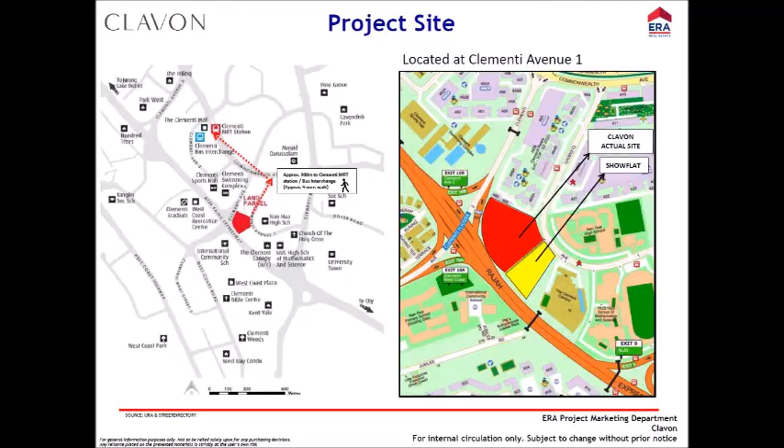Why are we sharing with you a little bit about how the name is being derived? Because that is the very idea the developer felt they wanted to make sure that when they wanted to derive the name CLAVON, they wanted it to be very linked to the origin of the site analysis itself.

So let's take a look at this CLAVON. CLAVON, Clementi. They studied the site - a very strong educational hub.

In fact, Mr. Liam, the Group CEO of UOL, based on his personal analysis, feels the world is getting more uncertain - trade war, COVID-19, etc. Educational hubs going forward will be ever more important, because a lot of foreigners, even many from Asian countries, will start to come over to Singapore for higher learning.

For instance, the nearby NUS is ranked as a top school in Asia and also the world. So this location analysis is also like an extension to One-North, an extension to the second CBD in the West, as well as the Greater Southern Waterfront. You start to see this?

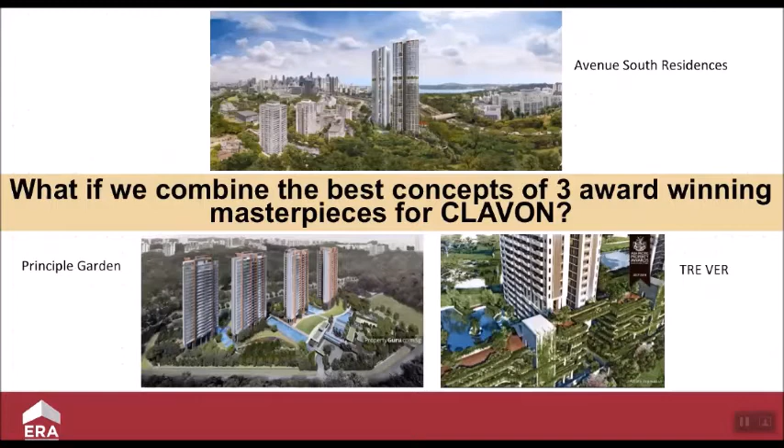Okay, so now look into CLAVON itself. It has sloping terrains. And the sloping terrains offer opportunities like upper decks and lower decks, which I'll be showing you the perspective later, and also the opportunity to create nooks and corners.

That is the best practice that the developer and architect actually provided for Tre Ver. So the nooks and corners will also be introduced into CLAVON to provide more social space, family magical spaces. Not only that - because of the down-sloping undulating terrain, it also provided an opportunity to build a basement car park, so that when we build a basement car park, we free up more land, more landscaping for the whole community.

Unlike our neighbor, the Clement Canopy, we want to be different, remember? In this case, the theme must be new, must be different. So our neighbor is building a multi-story car park, but ours will be a basement car park.

The overall theme would be a 5-star resort-style ambience. It's up to 40 levels, and it's a rare opportunity also - when the developers studied the site, they gained the best practices from Avenue South Residences, where one block will not block the views of another block.

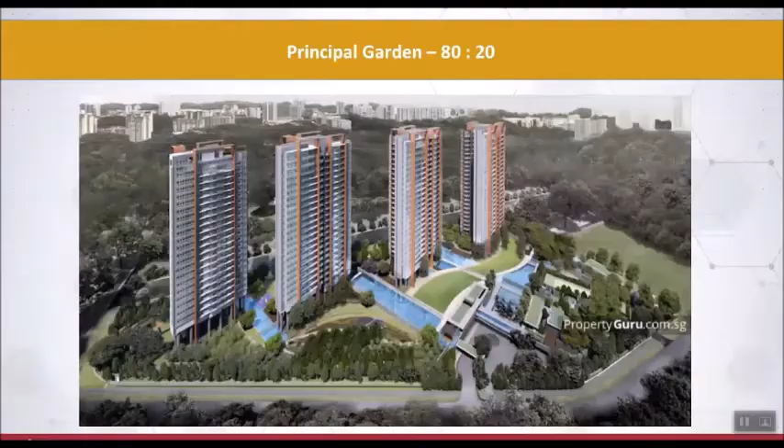Let's go deep now. As you can see from this, feel it, the 80-20 rule. Can you see the footprint? It's going to happen in CLAVON. Ladies and gentlemen, it's going to happen in CLAVON. The 80-20 rule, Tre Ver's nooks and corners. There will be pockets of nooks and corners for us to do our work, for us to enjoy. It would also be in CLAVON.

How about this? The majestic tower, towering all the way up with unblocked views, far views, will also be incorporated in CLAVON.

Award-winning developer, as you're aware, not only winning local awards, Asia awards, but also FIABCI awards. I only want to bring to attention the 3 award-winning masterpieces. Can you see Principal Garden? It is not short of awards. Can you see Avenue South Residences? Not short of awards. You name it, we have it.

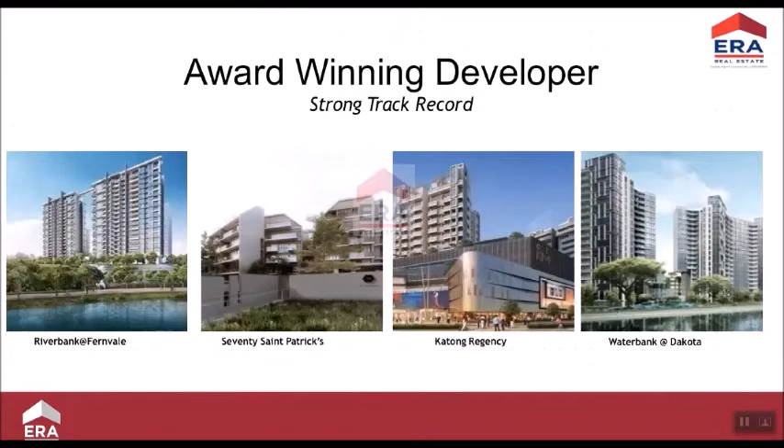And we're getting all the best practices into CLAVON. Take a look at Tre Ver. So that is that very gist. They want to get all the gist and the accents of these few developments coming together to make this outstanding product, CLAVON.

Bullet point number 2, architectural inspiration. In this inspiration, there will be 5 important things you need to know: site analysis, design concept, unit block plans, project concept, and perspective to give you that different kind of experience.

I'm very excited when I see this because the price is so irresistible with such a strong product. This 4th quarter 2020 will be our day, and our buyers' day as well, because they'll be getting this wonderful product at such an irresistible price.

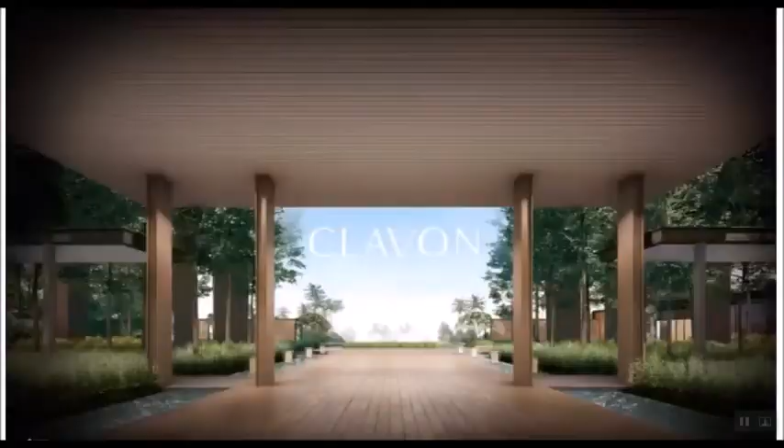So take a look at site analysis. Can you feel this, ladies and gentlemen? What did you see? That very feel when you come in. Can you see this? Later, I will elaborate a little bit more on that.

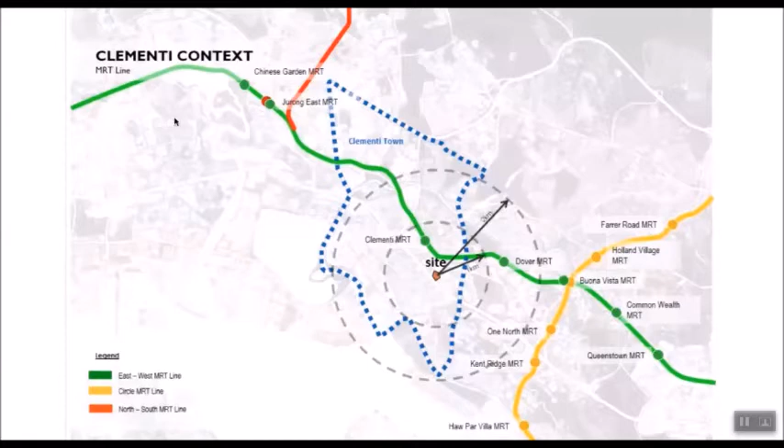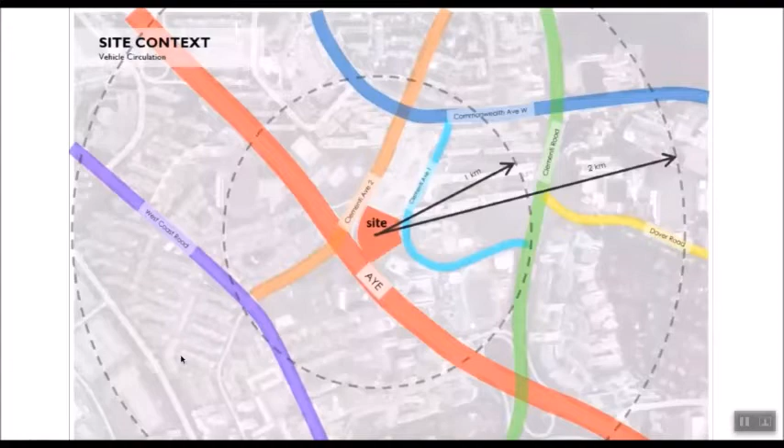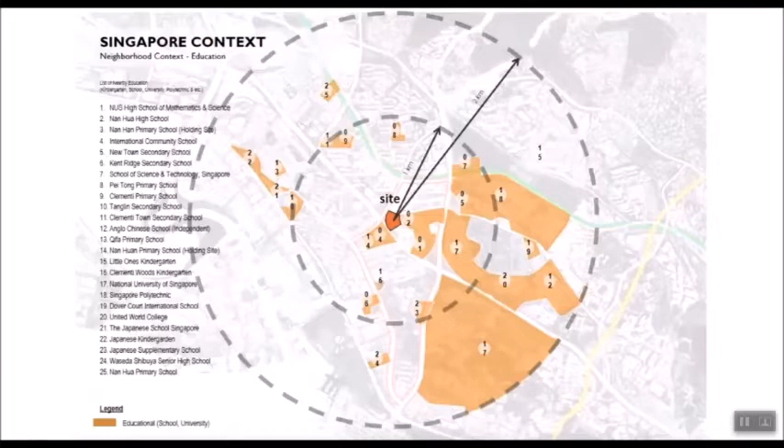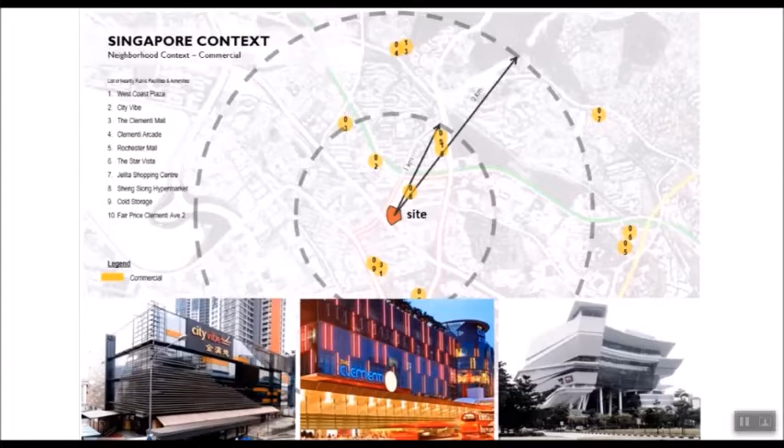Towards the east, the Singapore Botanic Gardens, and towards the city - that is towards the east. How about towards the south? Towards the south you get to see what we call the Singapore Strait and the sea view. Why is this so important? Because now we're analyzing the site - it has huge implications on the views that the architects are going to cleverly design to ensure optimization of views are afforded to all the clients, all the residents staying within CLAVON.

And how about to the west? To the west you'll be enjoying the Pandan Reservoir. See that? So you need to get your north, south, east, west view from the location CLAVON to have this big picture, so that you understand the overall architectural inspiration behind CLAVON.

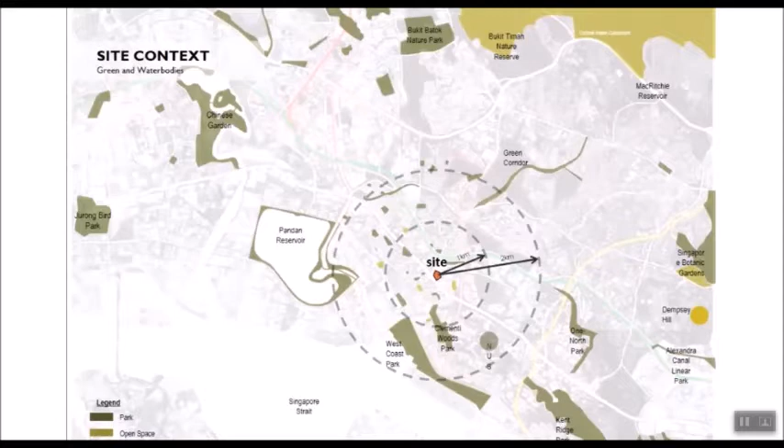So take a look into the master plan right now. As you can see from the master plan, towards the north, the plot ratio is 3.5, that's why it allows CLAVON to build up to 40 stories high. But of course in this context they build up to 37. But we can build as high as 40 stories based on the 3.5 plot ratio towards the north.

How about towards the east, where you get to see the educational zoning? Towards the south you already know the sea, and towards the west is where Pandan Reservoir is.

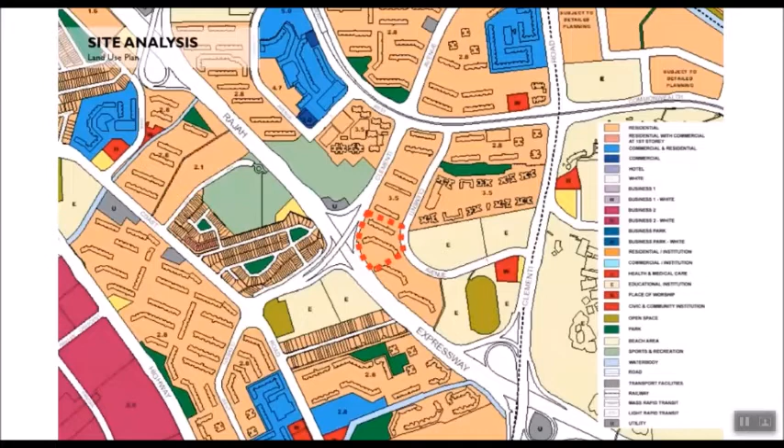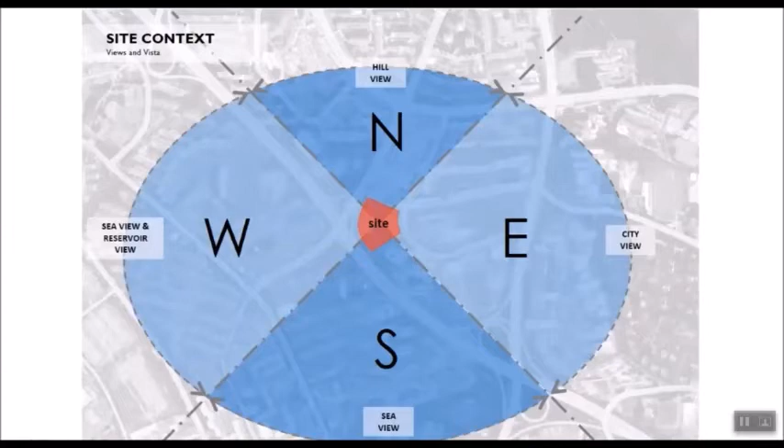So in summary, that is where it'll give you an idea. Hill view towards the north, city view towards the east, sea view towards the south, and towards the west the sea view as well as the Pandan Reservoir view. So that is the site analysis.

Now let's move into the design concept after knowing the site analysis. The very idea is to bring up the two majestic towers. So we explain why it is 37 floors. Because the developer actually lifted the majestic tower up by 8.5 meters, which is about 3 stories. So 3 plus 37 is 40.

You see my cursor here? They lift it up so that there's a very huge elevation buffer away from the AYE - an elevation acoustic buffer.

Not only that, when you lift up, can you see the green color arrow? Because of the undulating terrain, it allows a cascading upper deck and lower deck feel all the way down. Remember CLAVON - they wanted to be new, different, refreshing. It's very different because we rarely see a condominium enjoy this cascading upper deck, lower deck feel.

All the units are going to be north-south orientation. There's not a single unit that's having the west sun. Can you imagine that? It's amazing - it's going to benefit all the residents.

For all those higher floor lovers, you get to see the panoramic views unblocked. For those on lower floors, they'll be enjoying the cascading, beautiful landscaping view that soothes their emotions, that soothes their soul when they're working from home.

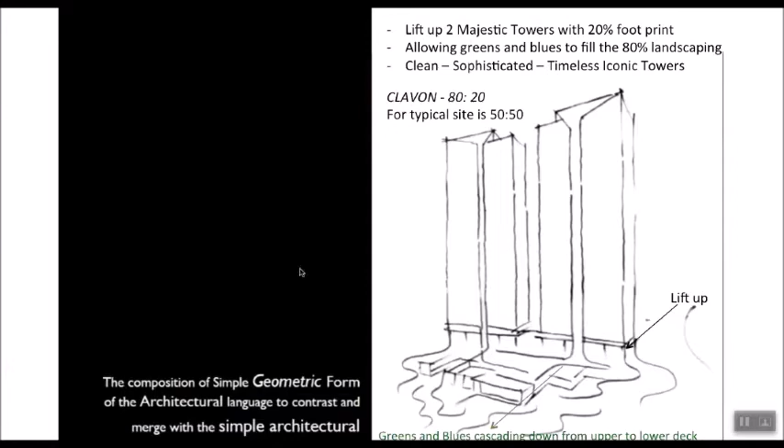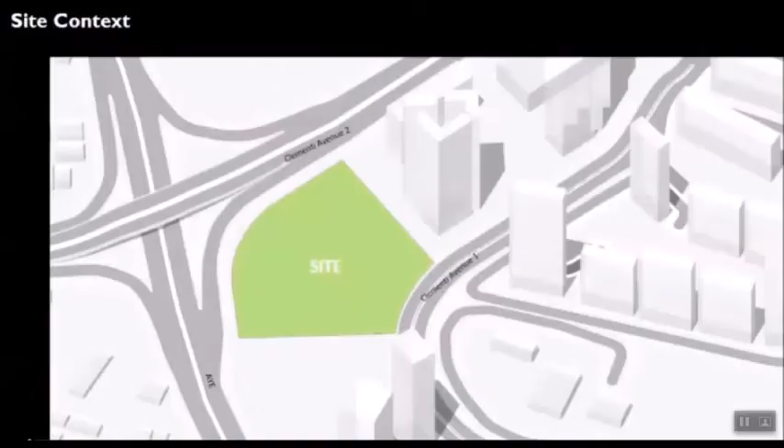Let's take a look at the site right now - zooming in at the site, the constraint. Constraint can become an opportunity when we analyze it properly.

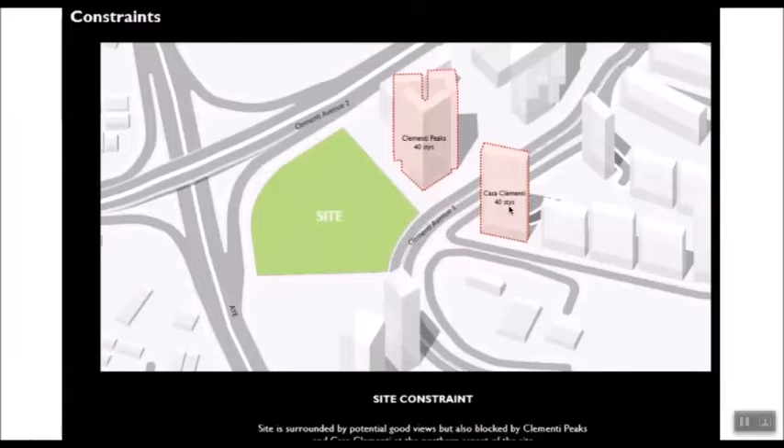Towards the south, you get to see there's the 40-story HDB block called Clementi Peaks and also Casa Clementi, towards the north. Let me superimpose the building for you right now. Can you see these two majestic towers? One is block 6 and this is block 8. This is the elevated tower we mentioned earlier on.

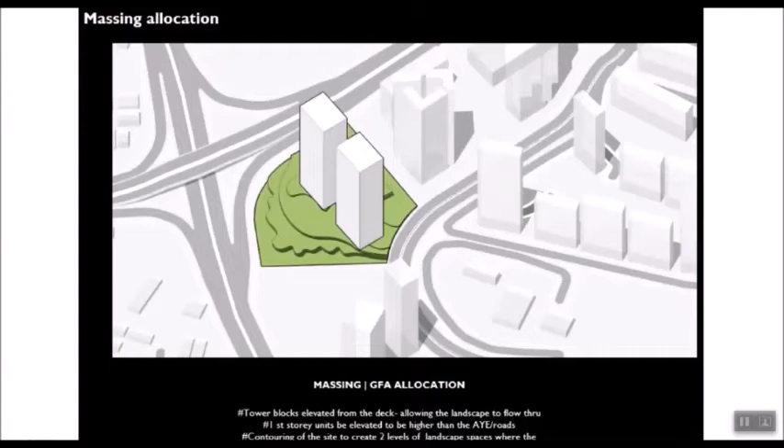And how about towards the north? Towards the north, the developer and architects deliberately tilt the block. Can you start to realize they tilt the block? I think very observant.

I'm very excited, okay. So you can see they actually deliberately tilt the block. Initially it's straight, but they tilt it. Why do they tilt the block? Can somebody make an intelligent guess why they tilt these two blocks?

Yes, to optimize the view. Thank you, CK. Thank you, Linda. Better view, yes, please participate, because once you participate, the whole key gist of the inspiration will be within you. Correct? No blocking sea views.

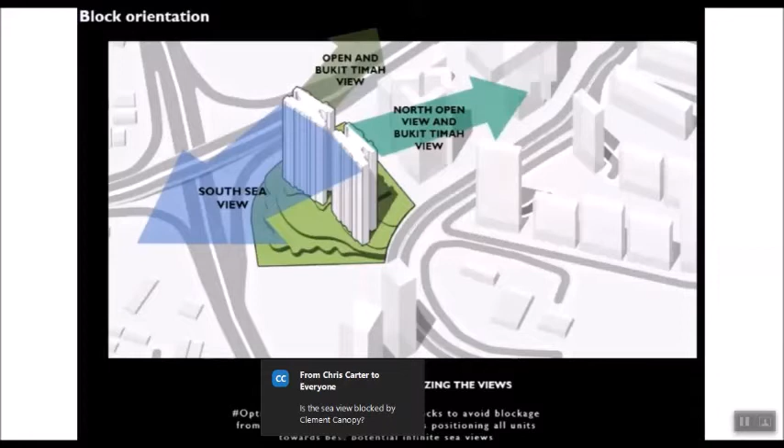Yes, you're right. You see, they're using size, using computer dimensions. When they tilt these two blocks, Majestic Tower, towards the north, they will be able to see that corridor, the Bukit Timah corridor view towards the north. That corridor view affords the best view for those who buy units facing towards the north. The ones facing towards the south will get sea views.

Remember the site analysis? So all this will come into play, because we know the surrounding well.

So the whole gist, the whole inspiration is focusing on what? Maximization of views. Can you write: maximization of views and lights into the units? So not only is the two majestic blocks north-south orientation, the overall architectural concept is to also maximize views and maximize air and light within the building.

Can you see I superimpose now? Yes, Jesse, you're right, maximization of views. Take note: views, light, maximization of views, light and air, because of the north-south orientation. Ladies and gentlemen, know how to articulate this very concept, maximization of view, air and light into the unit. Can you imagine you are the resident staying in it? You enjoy fresh air, because it's being tilted to make sure the air will flow into the unit, the light will flow into the unit because of the tilt.

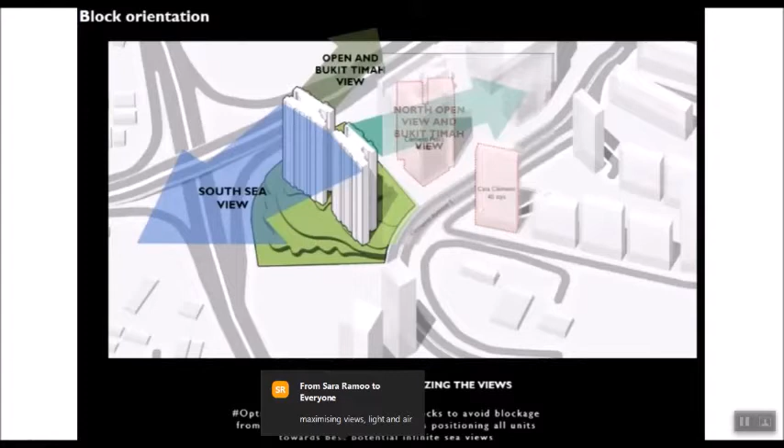You saw the tilt? Can you see the two 40-story red color buildings? It is deliberate tilt to have that corridor, open corridor view towards the north. See that? It is very attention to detail. So show all these slides to your client when you see them face to face. You see that red color one? The positioning is for that purpose.

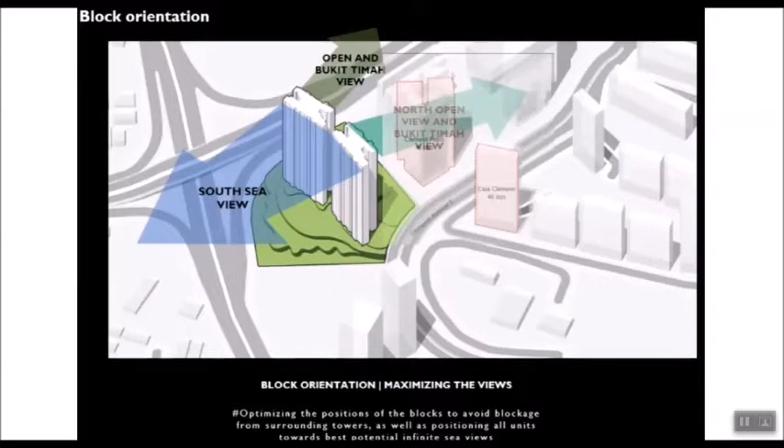That is the ground level, all the way to the infinity, to what we call the upper deck, to the lower deck. And this building, remember, it is being raised, okay, raised 8.5 meters, almost approximately 3 stories. And that is where the AYE is. From this distance, from the AYE to the units, is as wide as 31 meters to 90 meters horizontal buffer. Can you see the horizontal buffer, the noise buffer?

And not forgetting that one is a slip road, the noise level is actually very minimum. Plus, for the windows and sliding doors, it's thicker compared to the ones facing the other side. Not only that, acoustic ceiling will also be provided for all the units facing towards the south. While they enjoy the nice view, they also enjoy the acoustic treatment. And a window restrictor, with the calculation of the window restrictor also provided, to reduce the noise level decibels to the minimum. So these are all the attention to detail for one to enjoy in CLAVON.

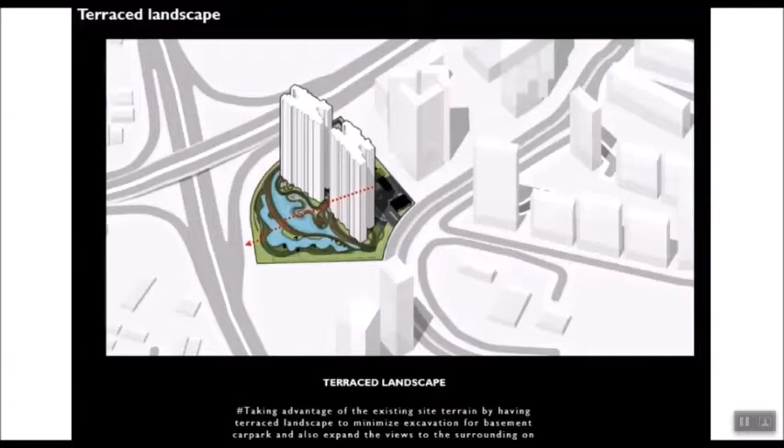Yeah, so take a look more. If you look at this expansive view right now, towards the north, hill view; towards the south, sea view; towards the east, city view.

Yeah, all the units are north-south. Towards the east is city view and towards the west is Pandan Reservoir view. Later I'm going to show you the attention to detail - they also want residents to enjoy both the east and west views, which I'll show you shortly.

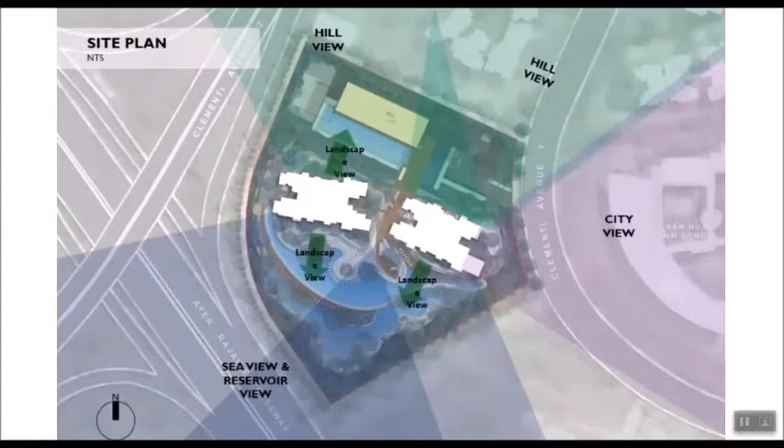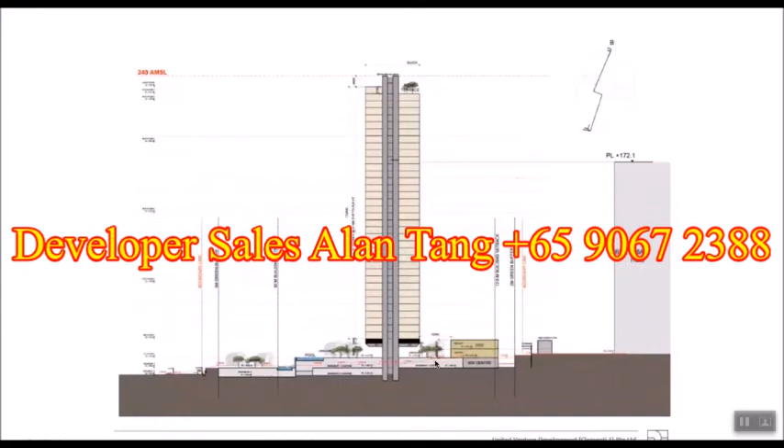The bin center and the substation are tucked into basement 1. The whole of basement 1 is actually the basement car park, tucked quietly below.

This is what we call the upper deck, and this is the lower deck. You can enjoy 2 infinity experience views. The first infinity view - take a look here. Remember the theme: new, different, refreshing. It's an OCR project that offers this unique product that no other project can match, even compare. As you can see from this infinity view on the upper deck, there's another infinity view towards the treetop, which I'll show you shortly.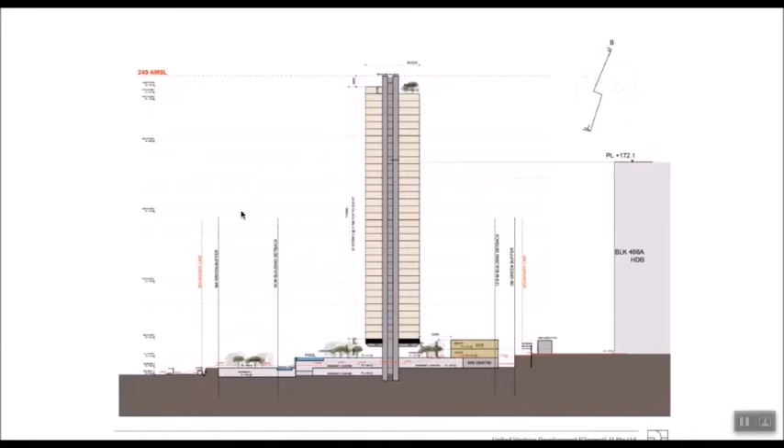At the highest level, it's the 37th floor. Remember the east and west view - that's where they've imbued the sky terraces for all residents to enjoy panoramic views and sky dining experiences within the 37th floor roof terrace. Can you see the roof terrace that affords one view towards the east and one towards the west? That's the concept of this very high-rise majestic tower.

How about the site plan? Looking at this site plan, you can see there are 3 side gates. One side gate here, and another side gate towards Clementi Avenue 2, where residents can walk over to Clementi MRT very easily. For those who know how to recce and walk through the HDB, you'll realize it's even shorter if you use this side gate to walk towards the MRT.

There's another side gate at the bottom - 3 side gates in total for residents to leverage to get to amenities and transportation hubs. As you come in from Avenue 1, that's where you enter this grand entrance, which I'll show you in a perspective later. It's very private - as you come in, you'll also be privately led into the basement car park without disturbing your entrance, giving you that flexibility.

This is a 50-meter lap pool at the upper deck. A nice clubhouse - the clubhouse is going to wow you, with three themes. Function rooms 1, 2, and 3 each have a very competitive theme for residents to enjoy, with games rooms and karaoke rooms all tucked into this corner. The 80-20 rule - can you start to see it on this very small footprint of the majestic tower? It's actually flushed and surrounded with all the landscaping, hugely covered by greens and blues cascading all the way down. That's the ideal.

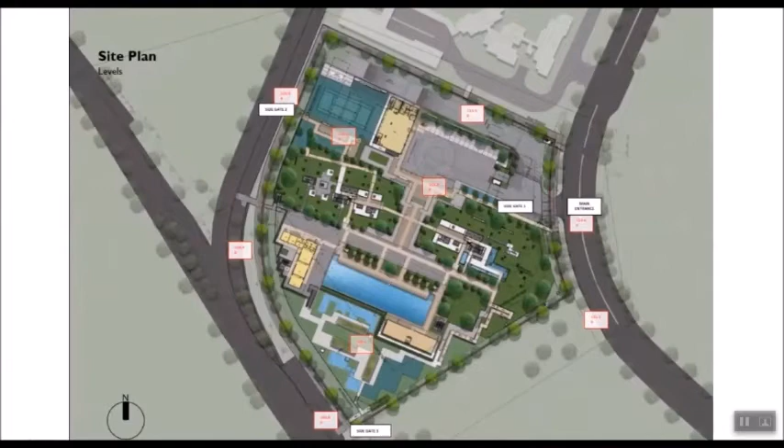Basement 1 is where all the car park is, and basement 2 as well. So now, imagine the experience of driving along Clementi Avenue 1 as you enter.

The main idea is new, different, and refreshing. When you come in, you won't see the building - it's a controlled, very nicely calibrated view where you'll be greeted with this vast grand entrance on the drop-off. As you enter, you'll be greeted with this infinity, wide, expansive view towards the sky and towards the water, and you'll be walking towards the forest corridor.

Can you see the 2 linkages here in my perspective? These linkages lead you to your respective apartments, without being disturbed.

Can you see that golden-feel roof that gives you an upper luxury feel as you're greeted coming into the entrance? That is the very first experience the developer wanted residents, family, and guests to enjoy when they come in.

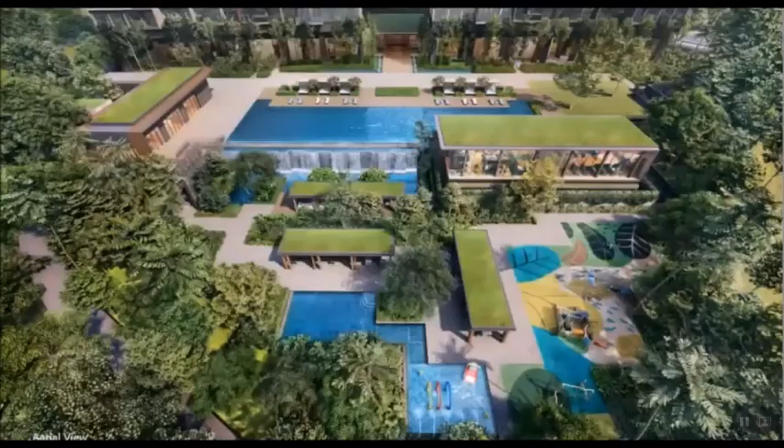Can you see from here, it's cascading down all the way to the water cove where you can enjoy? On the right is the gym and social lounges, what they call the gym and social lounge. It gives you all the nooks and corners, and from here you're able to see the infinity pool.

You also get to see the lower deck playground. Imagine as a papa and mama enjoying this view while overlooking your children playing at what we call the children's paradise. This is the dry play and that's the wet play, and this is the kids' pool at the lower deck. The whole upper deck is more exclusive, 5-star light ambience, while the lower deck is more family, community, social ambience. They want to bring these two experiences together within CLAVON.

That's the aerial view from the top, and another view towards the clubhouse. This is the clubhouse, and to the left is where the gym and social lounge is, giving a different perspective. This is function room 1, themed around overlooking the water courtyard to give a more official kind of feel.

Say for example you want to get some important business associates over - it's a different mood, different theme. The second function room is more leisure, facing the infinity wide 50-meter lap pool, overlooking the pool deck. This is where you can get your family over, or quietly come into the function room to do small gatherings.

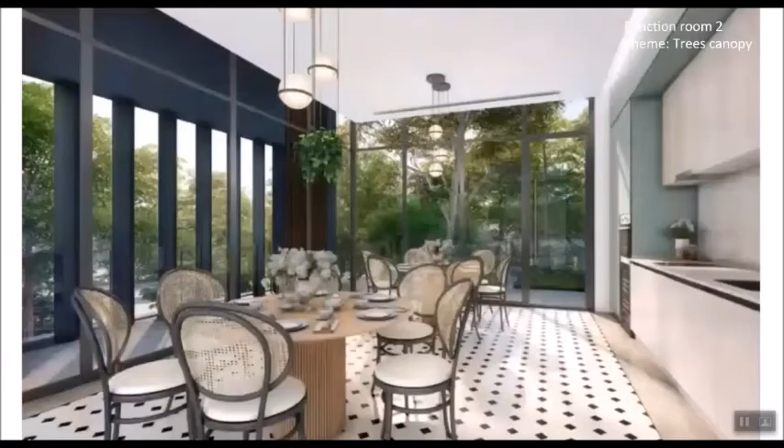The third one is on the canopies, the tree canopy experiences, providing three different experiences for you to enjoy. There's another view from the pool deck towards the gym and social lounge, giving you an infinity expansive view while enjoying the sunset setting. It's amazing.

It's amazing - you can tuck into this corner here doing some reading, enjoying the expansive 80% landscaping that seldom condominiums offer. This is another experience, the nooks and corners where you can go into the lounge, sit at the sofa here, and enjoy the whole overarching view of the soothing cascading water, seeing the landscaping of the upper deck towards the lower deck. That's what they want you to enjoy.

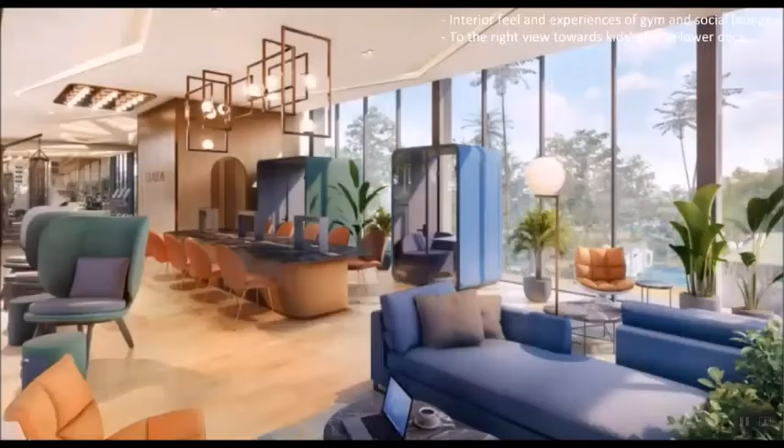How about the interior? The interior is sophisticatedly designed, very contemporary, to give you the right feel. On the right is where you get to see the children's kids' play area, and further up here is where it integrates between the gym and the social space.

Imagine after a day's work, you go for your gym, and afterward you can just proceed to the social space to do some reading if you want. Or even your wife can be reading the newspapers while you're doing your gym. It's all important attention to detail, to bond the residents together.

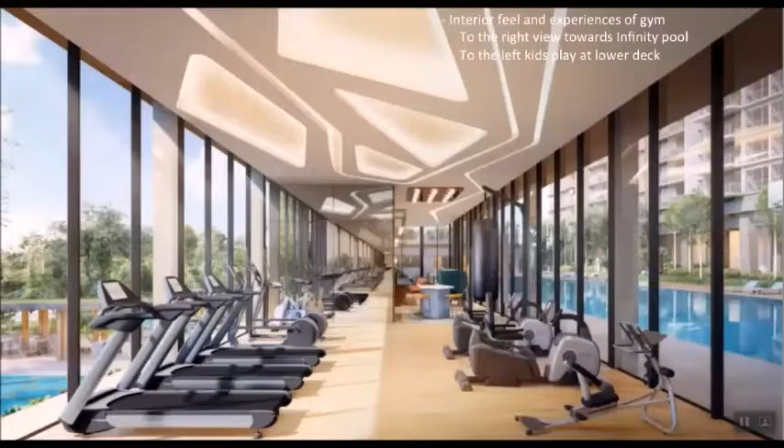This gym gives you two different experiences and views - one on the right towards the infinity pool, leveraging a glass partition to enjoy two expansive views. Towards the left is where you can enjoy gymming while also getting to see your kids playing at the kids' paradise area.

So it is that very different experiences that CLAVON wants to bring out the best of living for all the residents within it. Now let's zoom into the units and the block plans.

As you can see, the east and west views are being leveraged on the 37th floor. Tower 6 faces west, towards the Pandan Reservoir, where families enjoy that view on the 37th floor. Tower 8 enjoys an expansive view towards the east, the city view. So you get the best of 4 views: north, south, east, and west, giving residents that diverse experience.

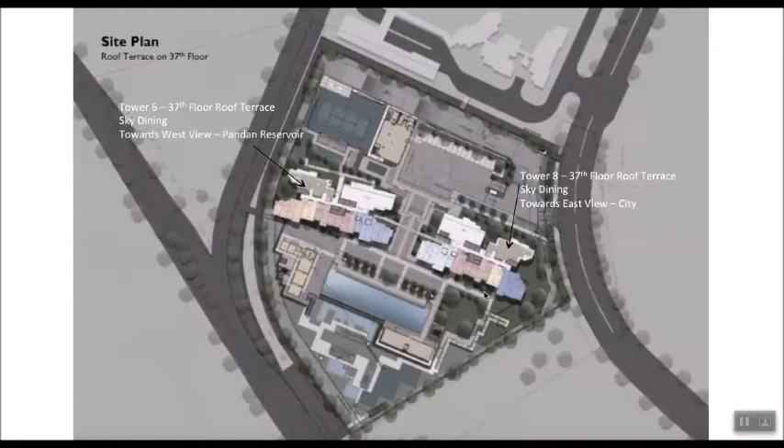And this is the site plan, with very sophisticated, well thought out facilities. All these amenities are actually tucked away quietly down at the basement, like the bin center and a substation, where residents don't even notice it.

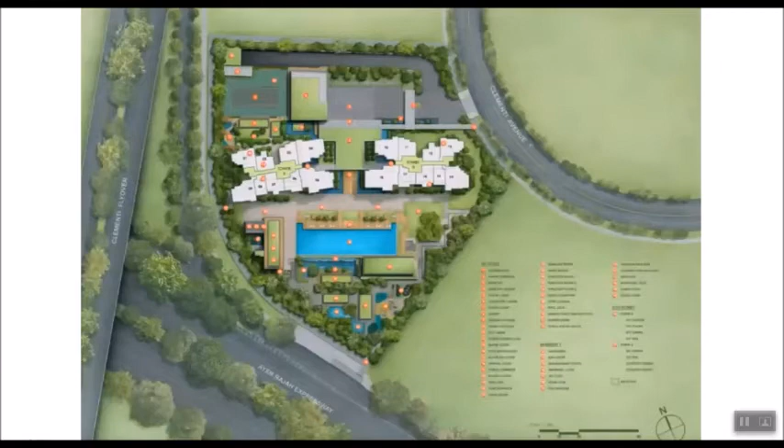The block generally has 5 units towards the south and 4 units towards the north, so in total 9 units per block. It is served by 3 lifts and 2 staircases. As you can see from this perspective, the bigger units - 3-bed, 4-bed, and 5-bed - are all tucked quietly at the corners. So all the corner units are 3-bedders, 4-bedders, and 5-bedders. The concept is very clean and simple.

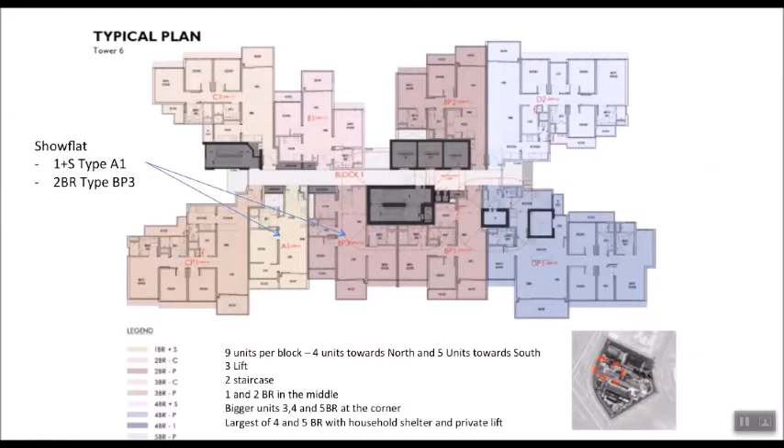As you can see from Tower 6, the highest level is where you enjoy the north, south, east, west views - in this case the west view. This is the roof terrace, and these are the 4 units facing south. Tower 8 is exactly the same concept, except the roof terraces face towards the east, what we call the city view.

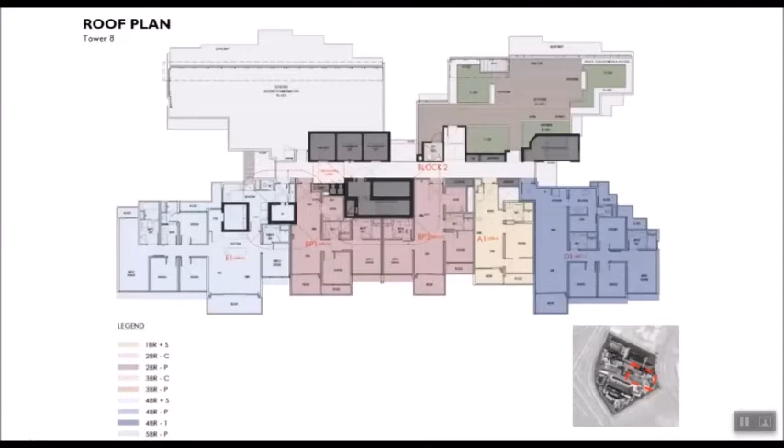Let's take a look at the floor plan. For the 1-bedder, as you enter from the main entrance, it's very sizable, with a nice kitchenette, greeted with a nice living and dining area. This is a next-generation condo concept, where you can enjoy a very sizable study area, divided by a glass partition.

When you see the show flat, you'll be totally wowed. Right now you only see it in 2 dimensions, but when you visit the show flat, likely next week, you'll be amazed - the size is so sizable. This layout allows more light and air into your bedrooms, and owners also have the flexibility to close it up if they want.

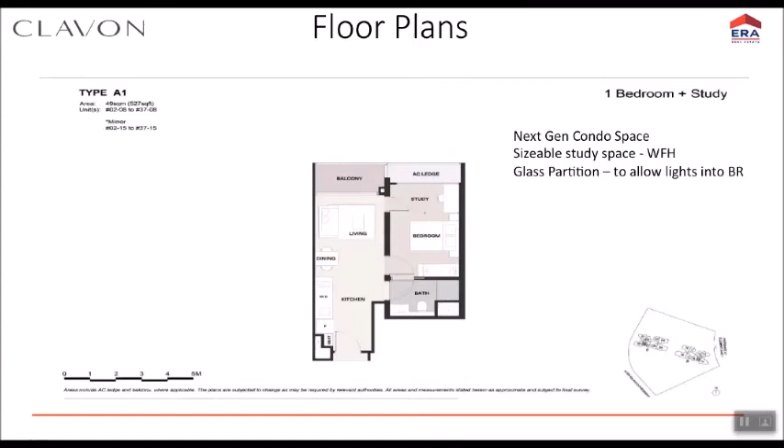How about the 2-bedroom? I'm focusing more on the show flat unit for now. It's a butterfly unit - can you see the butterfly wings? Superb layout with minimum corridor, in fact no corridor at all if you notice the 2 bedrooms - super efficient. On the left, the master bedroom easily fits a king size bed, and on the right, the second bedroom fits a queen size bed. There's also a nice closable kitchen, neatly tucked in. Most importantly, the living room, master bedroom, and bedrooms all face outward panoramic views.

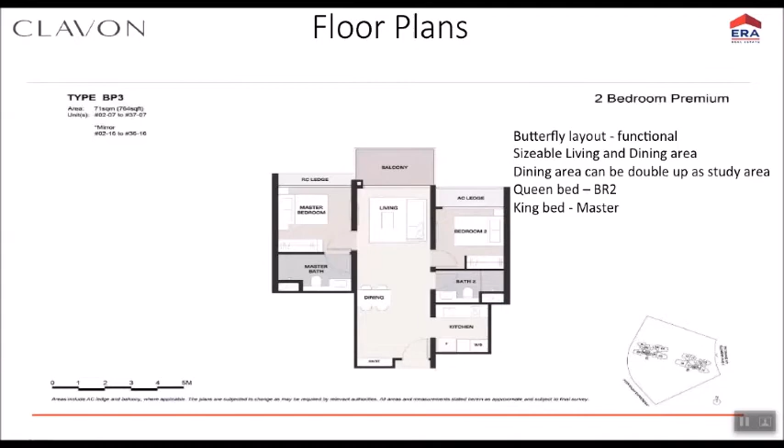So that is the show flat - show flat unit BP. P stands for premium, B stands for 2-bedroom. Just in case for those who are new, A usually refers to a 1-bedroom, but in this case it's 1-plus-study. So the show flat includes the 1-plus-study and also the BP3.

The butterfly layout is very good for investors, giving you the flexibility to rent out either as a whole unit or to 2 different tenants, since there's privacy with one going to the left and one to the right. The central area can also become a co-living space for those investors who want that flexibility.

And what about singles? A single may want to stay in one of the rooms and rent out the other, getting rental income to help ease their mortgage. So there's a lot of flexibility in this very well thought out layout.

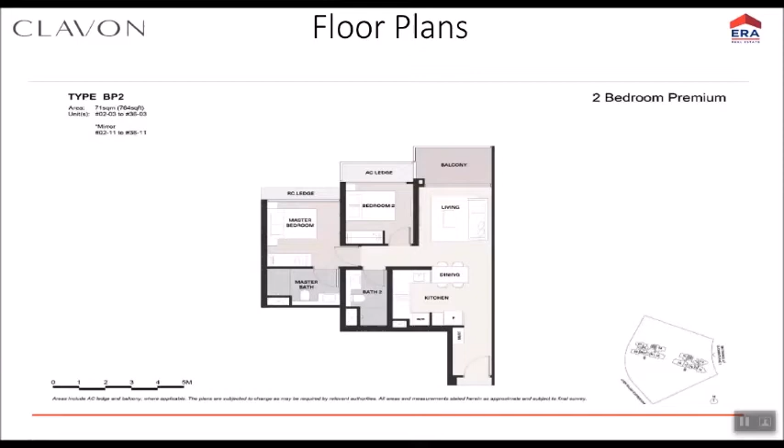Okay, this is the CP1. As you can see, C stands for 3-bedroom, P stands for premium. This is the show flat unit. So for the show flat, we have the 1-bedder, the BP3, and the CP1 — 1 bed, 2 bed, and 3 bed.

Take a look at this dry and wet kitchen. It comes with a very sizable dry kitchen for you to entertain your guests, and a wet kitchen for you to do nice cooking for the family. A lot of attention has been paid to the layout.

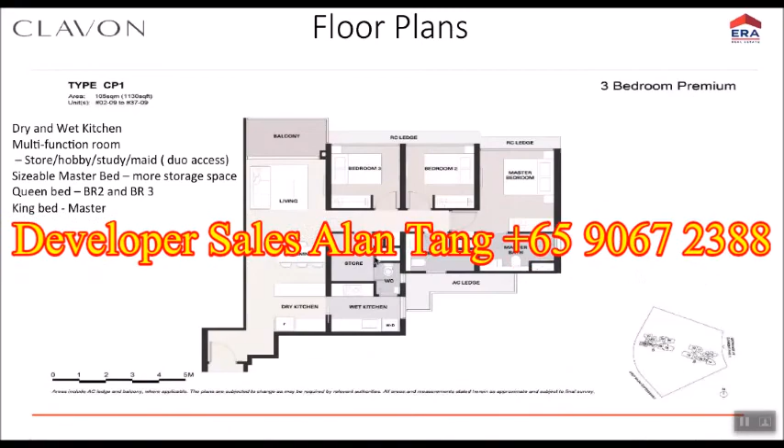Remember, can you see the storeroom is very sizable? This storeroom is not just a storeroom, it's a universal multifunctional room. You can double it as a domestic helper's room with an attached WC, so the maid enjoys her own attached WC and the whole yard area. Or you can double it as a study room if you want, since it's sizable enough, or for storage, or even a hobby room.

Can you see that? That's the main idea — the developers wanted residents to have this flexibility, because post-COVID, or the post-COVID circuit breaker, a lot of us are now working from home, so it provides you with that flexibility.

Bedroom 2 and bedroom 3 can easily fit a queen size bed, and the master bedroom is very sizable — you'll be able to fit what we call a mini study if you want. If you want additional storage area, you can fit that in too. It's unlike those very small master bedrooms; you're able to fit a king size bed and still have space to maneuver. Very functional for you to enjoy living in this 3-bedder.

Keynote is this part — the universal room. Take note of this, something very unique compared to other developments.

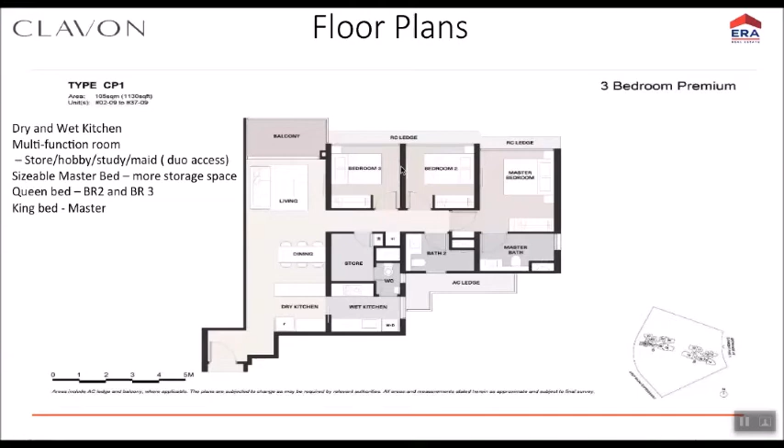This is the perspective. Okay, there's a typo error here, it should be CP1. It is a show flat unit looking towards the entrance — you have to see it, very beautifully done up. 3-bedder, marble flooring, good space, and so on.

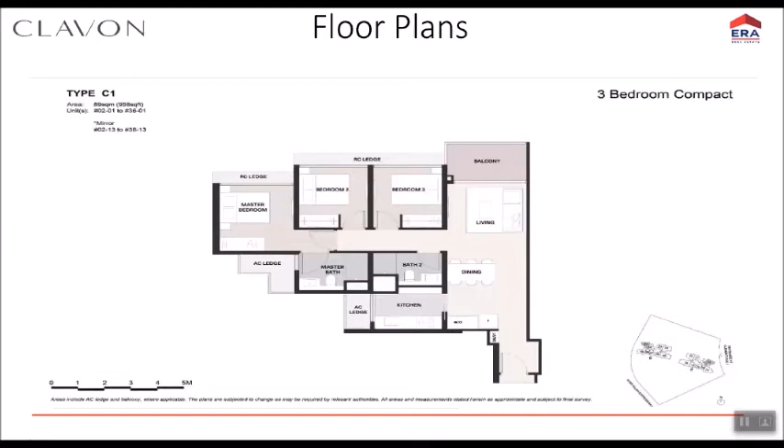So how about the other 3-bedders? The C1 layout is the smallest 3-bedder, at 958 square foot. As you can see, what's common here is that all 3 bedrooms and also the living room are all facing outwards, providing residents with maximum views, light, and air into the units.

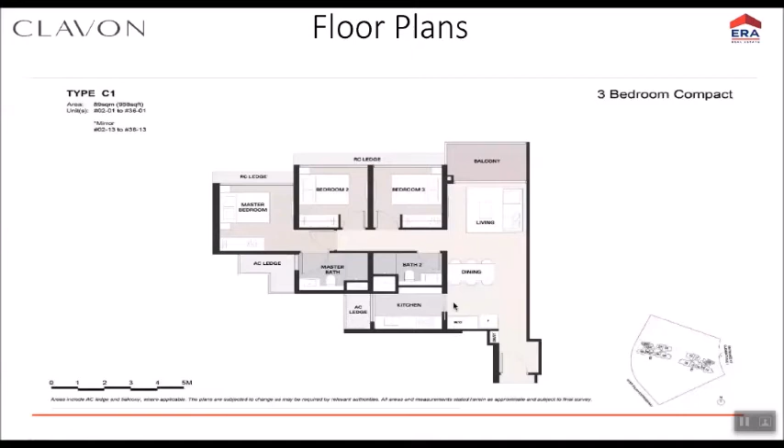Into the units we have what we call a naturally ventilated kitchen, very suitable for family stay, and a very well-connected bath towards bedroom 2 and bedroom 3. So this is the C1 layout.

How about the CP2? Remember, P is always premium, meaning a bigger unit — in this case, 1130 square foot. What is common? All the bedrooms, as you can see from here, and the living room face the expansive outward view. This is where I want to highlight for the premium.

Remember this store? It is a universal room. Can you see the linkages? They actually provide the flexibility to link from the wet WC out and also from the corridor. That dual access flexibility is important, because it gives you an idea how you want to use this universal room to suit your own family needs.

So say, for example, if I'm a family with a domestic helper, I can convert this into a domestic helper room where my domestic helper will be working along this whole area here, providing me with the rest of the privacy.

But let's say, for example, for a housewife who didn't employ a domestic helper, you can easily fit this as a study room, or we call it a mini library for your kids, where you line up all the books, etc., or even a hobby room, a study room, to enjoy.

So while you do your readings here in the reading room, the housewife may be able to just exit from here and start to do the cookery for the family. You see that? It is that flexibility to provide the needs and wants of the family for this whole layout. Don't underestimate this, because a lot of attention to detail is warranted before we are able to derive this kind of layout.

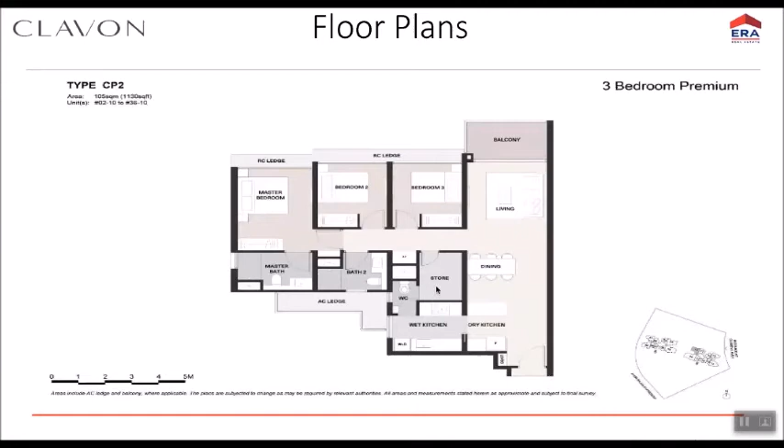As you come in from here, this particular bath is well connected to bedroom 3 and bedroom 4. And as you can see from this very nice, expansive master bedroom with attached bath, it's all very functional, easily fitting a queen or even a king size bed. And if you realize, the master bedroom allows us to also put additional storage if you want to. It is a sizable 1281.

Why does 1281 feel like a very affordable quantum yet very sizable? Because of the very short corridor. Did you realize that? A very short corridor is provided to allow you to enjoy this enhancement of the function of these units.

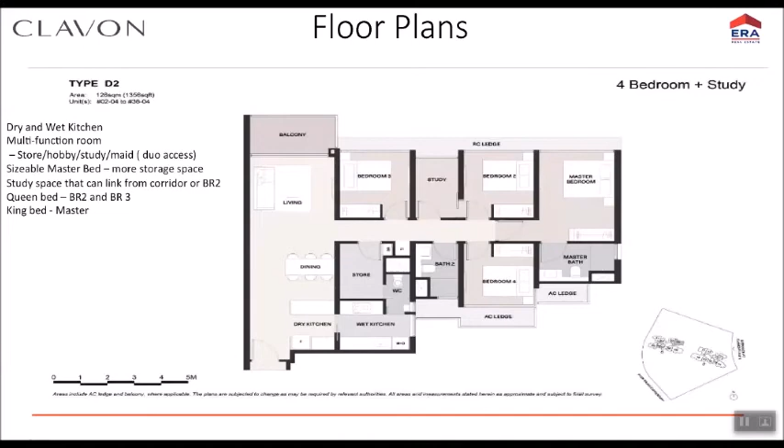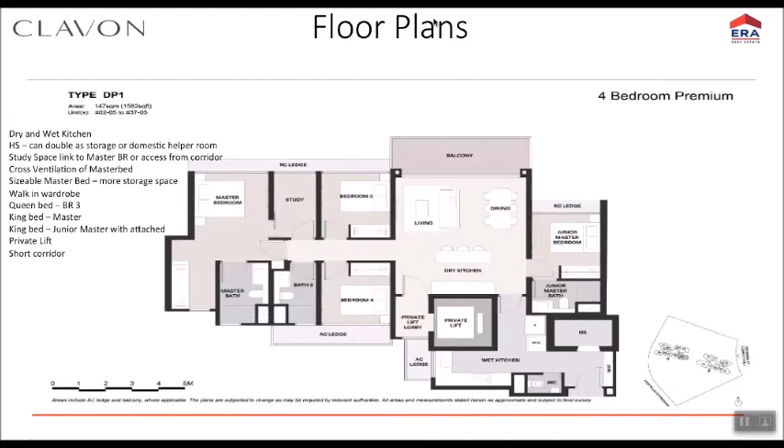Take a look, thank you for your patience. I just reset my computer. Cross ventilation for the master bedroom, as you can see. All the bedrooms can easily fit a queen size bed. Most notably, can you see the study room? It is actually connected to the master bedroom. These are some key things all of you need to be aware of, attention to detail. The junior master is tucked on the right-hand side of the layout, and it's 1582 square foot.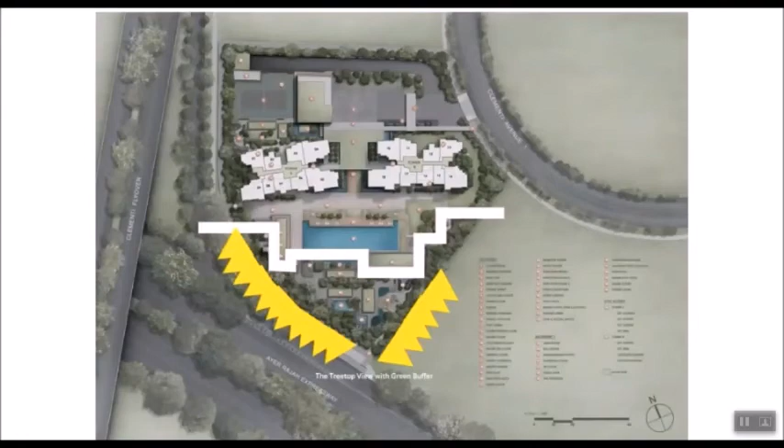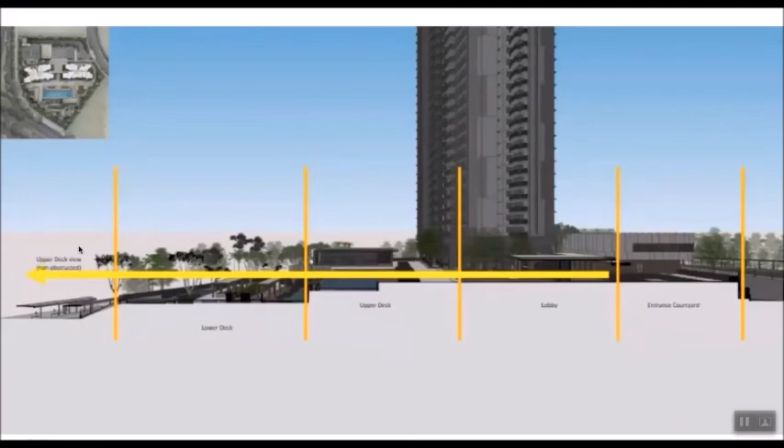These slides you can actually show your client as well. As you can see from this cross section here, this is the first, what we call, upper deck infinity view. See my cursor? And the other one is the lower infinity view. As you can see from this whole perspective, it's unobstructed, giving you that horizontal view, as measured by the landscape consultant.

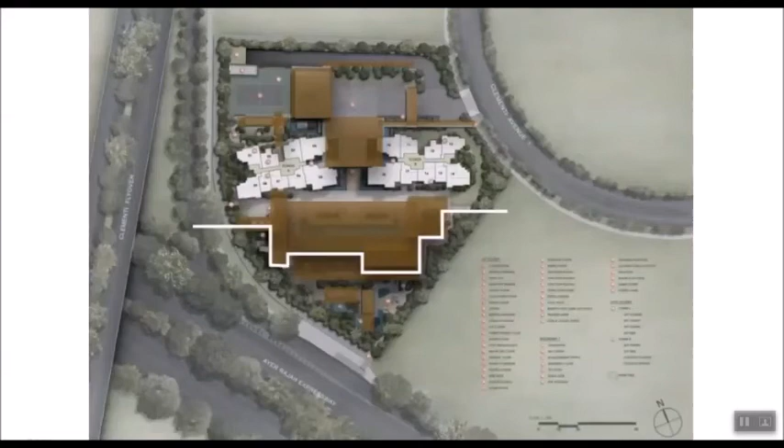That is the very raw drawing where they created the inspiration. Once they started tucking in all the social facilities, the 50-meter lap pool, kids pool, that's where they put everything together to make sure the dimensions fit. As you can see from the brown color scheme, the recreational area is behind. This is the grand entrance with the CCC, a very large grand lobby, with only 2 small footprints for these 2 majestic towers.

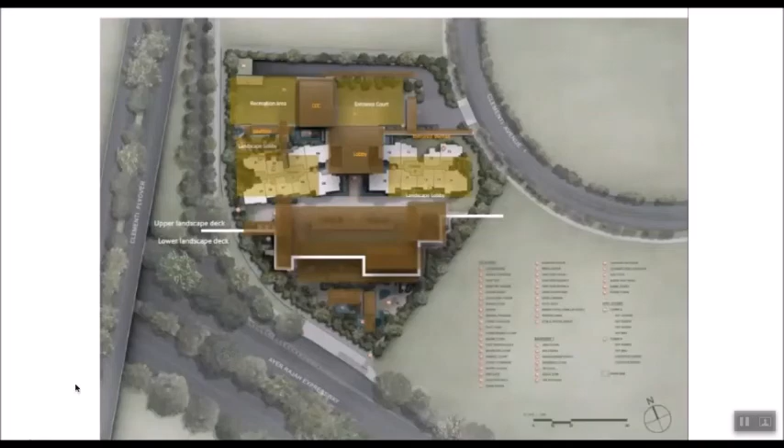And this white dividing line is where the upper deck is. Beneath it is actually having the treetops. Remember the B trees that's lining up the whole perimeter, leveraging on the 80-20 rule. The inspiration of this whole landscaping comes from this perspective here, a very large upper class view. That is where the architect wanted to create the very subtle but yet upper class luxury.

So let's take a look. The orange color here, I want to give you an idea about looking out, looking out towards the entrance. That is where you look out. Can you see from the arrow here? That is the very grand view, the contour view that we mentioned. And how about looking towards the infinity?

You saw the infinity lined up by the forest walk that we mentioned earlier on. So these are all well thought out, it doesn't happen by chance. You want to give it a visual corridor, the visual corridor all the way expansively to leverage on the terrain.

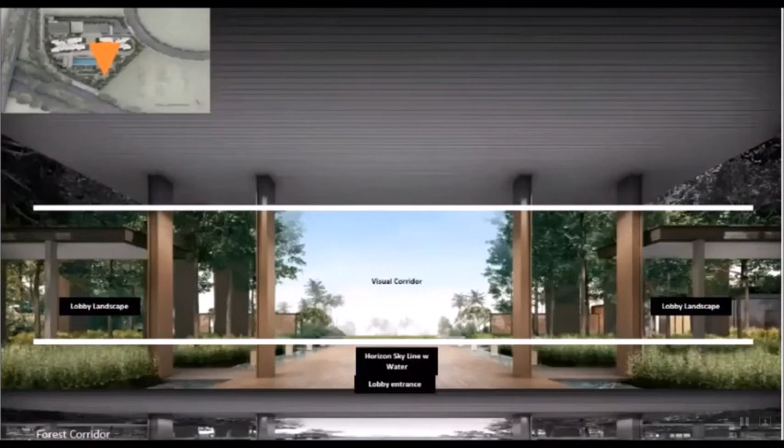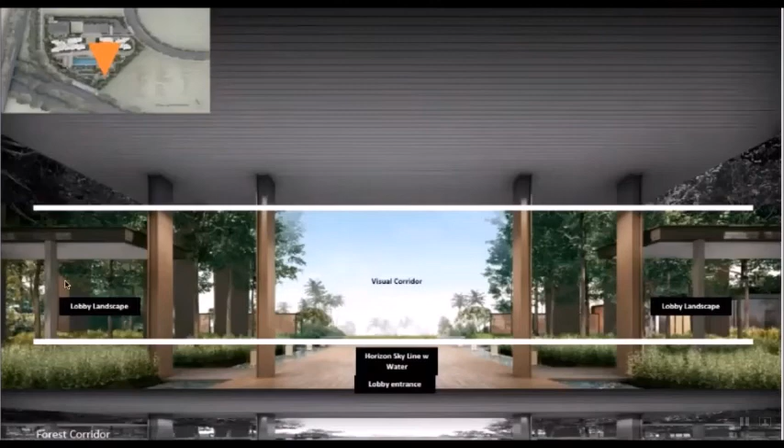With the left and right lobby landscaping, where can you see the 2 corners here? You see the 2 corners here leading towards your own, we call it own private apartments. And can you see this from the perspective here?

Where's this view? As you can see from the orange arrow that's lined up for you, this is the view. Let me orientate this a little. As you can see from here, you're looking towards the gym. Can you see this towards the gym? The one that's horizontal with that pool, right?

Just remember it, this is the gym and the social lounge is. Let me go into this. The vertical one is where the function room is. Remember the 3 themes of function room, 1, 2, and 3.

So this is to give it that feel of that lower and upper deck view experiences. You see the architect's drawing out the line on the upper deck skyline, and also the lower deck treetop line. So you get infinity and treetop view in this very CLAVON that is very different and refreshing.

Take a look at the upper deck facilities, where it's more exclusive. Remember the 50-meter lap pool, and also the gym and social room is actually on the upper deck.

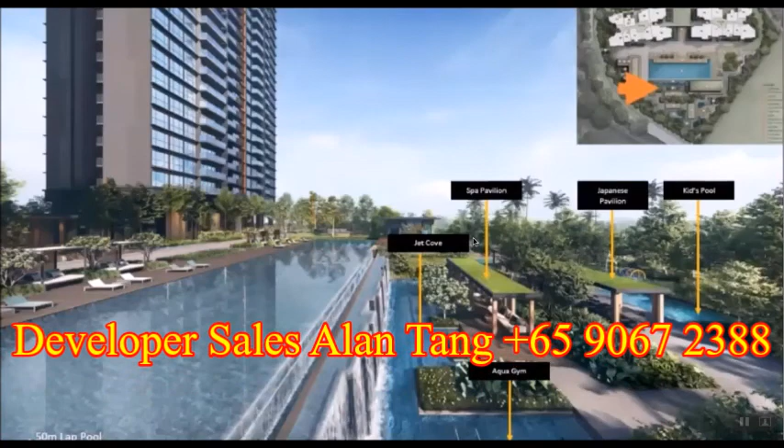So how about the lower deck, where the Jet Cove is? You saw the Jet Cove, the spa pavilion, the small nooks and corners where we can enjoy a little. So that's the 3-dimension down to the gym, aqua gym, to tone the muscle, and the Japanese pavilion where you can enjoy a nice, we call it bonding family time, while overlooking the vast 80-20 panoramic views.

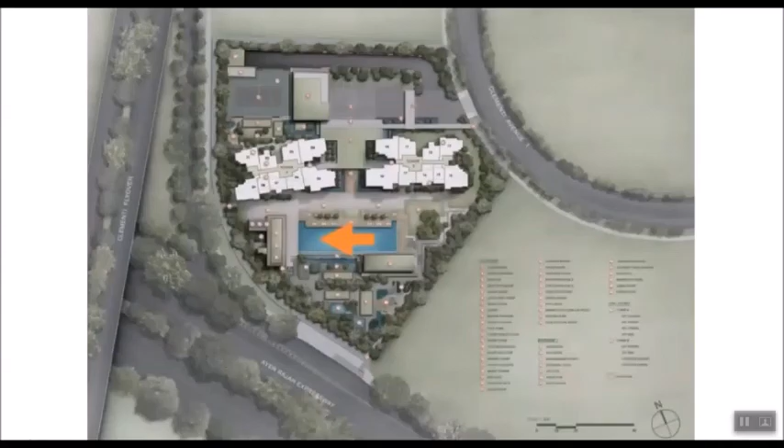How about the view towards the gym again? This is where the infinity angle that they want to achieve. How about towards the clubhouse? This towards the function room, towards the clubhouse, where you get to see these two, we call it horizontal and vertical. On the left, you get to see the gym and the social space. They give you all the different angle for you to enjoy.

You are like really living in the 5-class, resort ambience development where the UOL wanted to achieve for everyone. So you put this in perspective, you look directly towards the infinity pool. That is where it gives you the vast view. You saw that 3 lines, the nooks and corners, the 80-20 start to play out, the whole demonstration starts to play out.

The lower and upper deck - in fact, the basement car park is very neatly tucked behind this. Ladies and gentlemen, can you see my cursor? It's very neatly tucked behind this. If you didn't pay attention to the detail, you don't leverage on the terrain, the cascading may not happen. You may see the ugly car park. But all this is being tucked nicely.

The upper deck, remember, is the more exclusive ambience, and the lower deck is where the water play, the kids' paradise is - the water play and also the dry area. And that is another perspective and experience once again. See that gym and social space created, the waterfall, the jet, while you enjoy a nice meal.

And that is the water play. So water bonds family, okay, with Papa, Mama, Akong, and Ama. The aqua gym is there, see that?

And tuck all the way down to the corner. That's another perspective of the cascading water down. Can you see this coming from the lounge area that we mentioned earlier on? So all these are being measured.

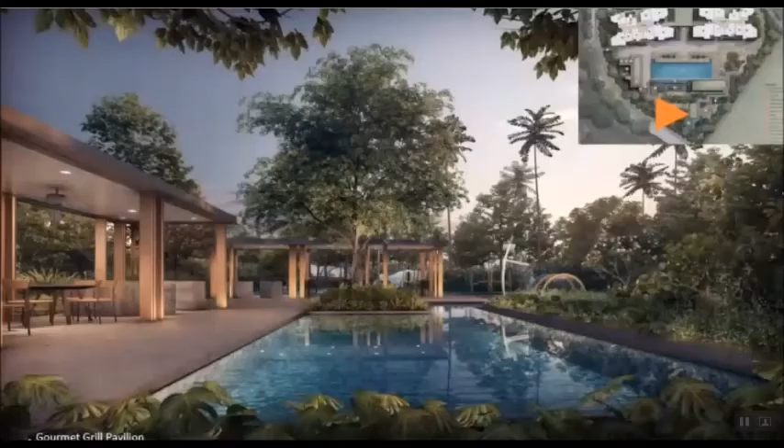Earlier on, when I start to show you, it's about the experiences. So it's to walk your client through the experiences that they can enjoy in CLAVON. As you can see from this pavilion, that is where you can enjoy a nice meal. We call it a gourmet grill pavilion with good friends.

While your kids can enjoy the play, the water play, and the kids pool play at the area here. And this is another water play, okay, for your kids to enjoy. How about looking towards the social?

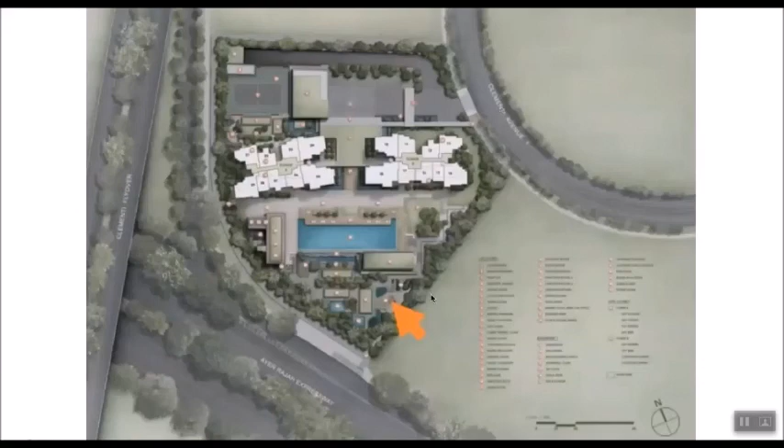In this perspective here, the social, you can see this arrow here, the social and the gym rooms, the air condition. So that is from lower deck up. Can you see the lower deck up?

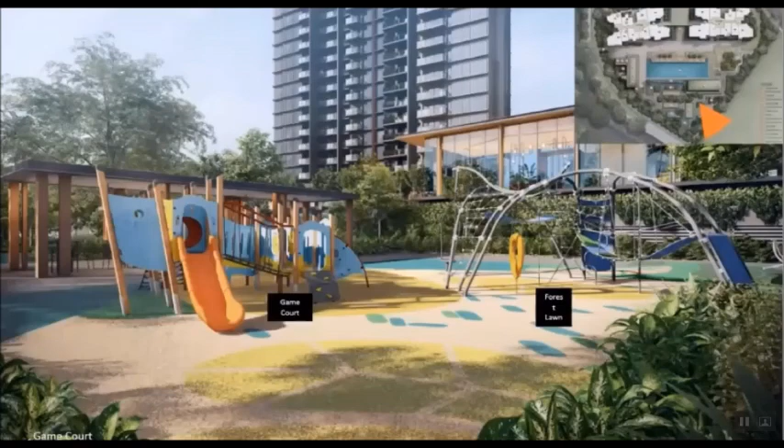The lower deck is where the kids' dry area is, and the forest lawn where they can lay around, while overlooking up will be the gym, right? While you may be enjoying the gym, looking down at your children. So that is that very perspective, okay, that they want to achieve.

And this is the awesome majestic tower that, remember, the very best of the best idea that you get from the Avenue South. The panoramic view that I'm going to leverage is the actual view from the 36th floor. Ladies and gentlemen, can you imagine that panoramic, the far view that we'll be enjoying, okay?

While taking into consideration the constraint, some of the clients may ask you about the constraint on the 40th floor HDB, right? It's already taken care of already by tilting the majestic tower towards the open corridor, towards the hill view. Remember the slides?

And how about this southern view? Southern view towards the panoramic, we call it landscaping, and the sea views. As you can see from here, even before it is completed, we already gotten this CLAVON.

Please read this very important line. Architectural Design Asia Award, okay, Asia Property Award 2020. Clean lines, soft gray tones of glass, and a V-crown accent, etc.

So that is the whole demonstration of this commitment by the very developer in this OCR project, by having that high-end upper class feel, okay, but paying at a very irresistible price, all right?

And this is the last part, ladies and gentlemen. It is irresistible. It's only 15XX for the 1-bedder and the 3-bedder. I cannot believe it. And it's starting from 14XX for the bigger units that's so exclusively functional, so exclusively rare and limited. And that's where one can enjoy, okay, in this very award-winning development called CLAVON.

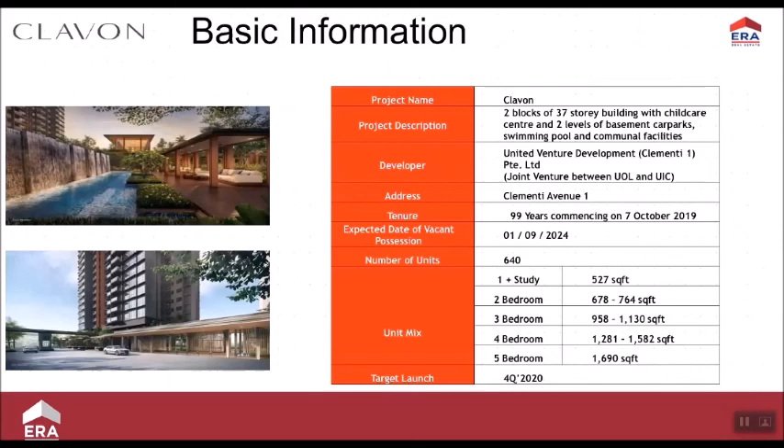And the whole concept in gist is the integration of the best from three masterpieces. And it culminates to provide a very strong product in strong location at very saleable price for this fourth quarter 2020. Yeah. So I've come to the end of this session.